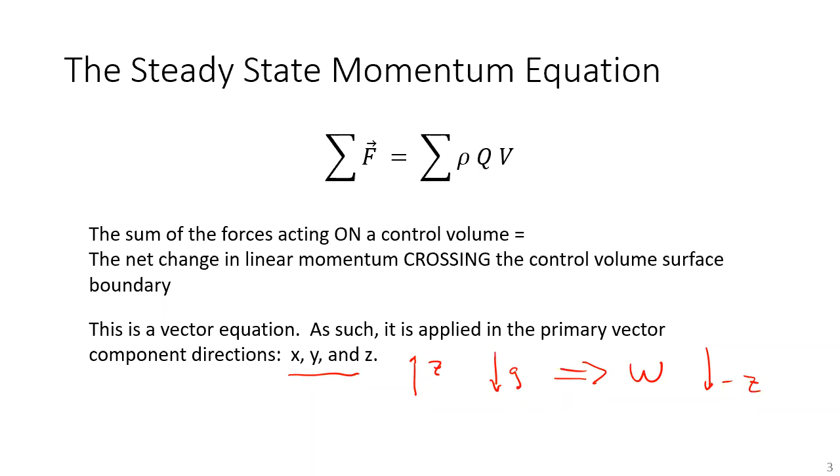And typically we align z to be vertical and gravity is in this direction. And so the net result is weight is a force in the negative z direction. So whenever you have analyses looking at something in the vertical, you have to start including weight. A lot of times when we're calculating this force, we're trying to restrain against the force. In that case, your restraint not only includes the weight of the fluid, but the weight of the control volume. Let's say it's a big pipe fitting the size of this room. So that resultant force would also have to include the weight of the external system itself.

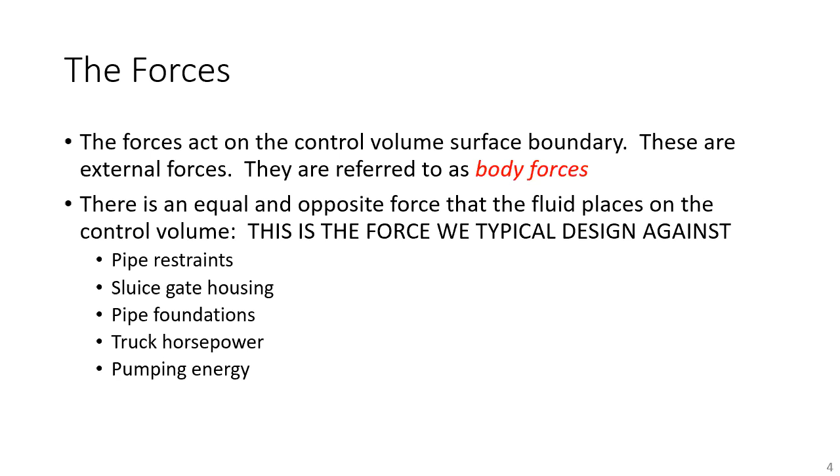So the forces are what we refer to as body forces. And again, there is a force of the control volume on the fluid. That is what's found with the momentum analysis. There's an equal and opposite force of the fluid on the control volume, and that's what we're designing against. And I gave you some examples. This is a slide you saw previously.

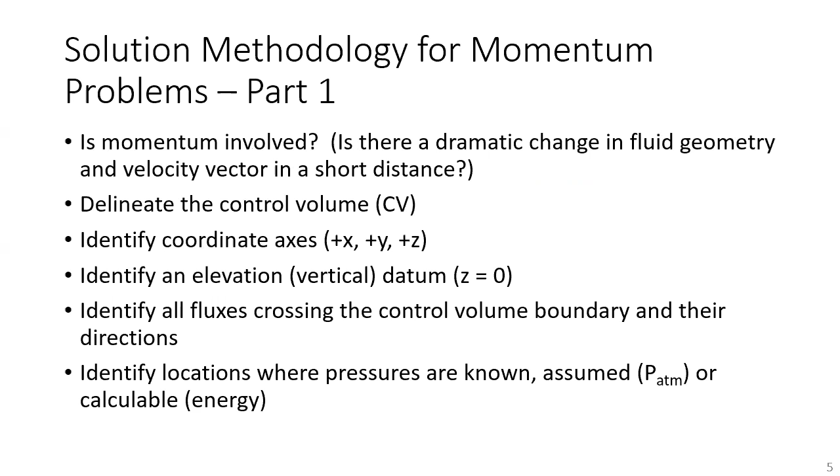So then I went through these methods, and I'm going to go through these quickly because you're going to see them on future slides. So as before with energy and all the others, I give you a rubric. Just follow the recipe and no one gets hurt. So again, there were 2 pieces to this, and if you follow the recipe, you can get through these types of problems. And lastly, how we draw the control volume is really important. We extend the control volume to either no flow boundaries or locations where we have one-dimensional flow. And where we have flow, we draw the control volume perpendicular to the velocity vector.

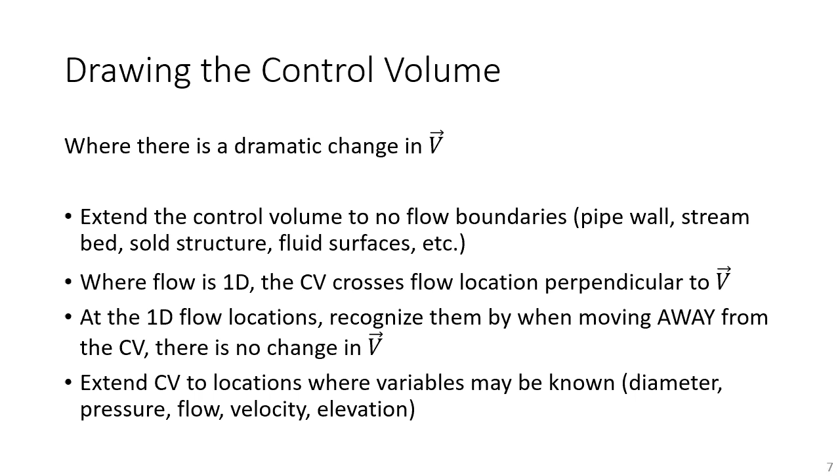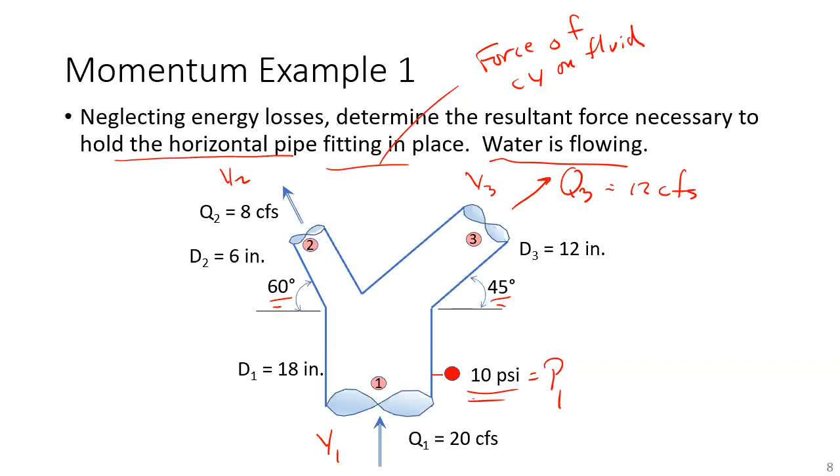So this is our problem, and this is what we're trying to solve. So again, you're going to see it on the next few slides, the same figure. And then on the left-hand side of this slide are all the steps. So first problem, is momentum involved? Is there a dramatic change in fluid geometry and velocity vector in short distance? Yes. So now you follow the rest of the steps.

The next thing, we need to delineate the control volume. And so again, the control volume is going to go to where we have one-dimensional velocity vectors. And when you see it drawn in here, we have one-dimensional velocity vectors here, here, 2, and here. And then everywhere else outside of those 3 locations, it's just the skin of the pipe. That's a no-flow boundary. So that's our control volume about which we're trying to do the momentum analysis.

It's hard to do a momentum analysis, especially for someone to review your work, if you don't show them what your control volume is. All right, the next step is to identify the coordinate axes, X, Y, and Z. And in this particular problem, we're just going to say that X is perpendicular to where 1 is coming in, and Y is collinear with 1. And again, the whole problem is in a horizontal plane.

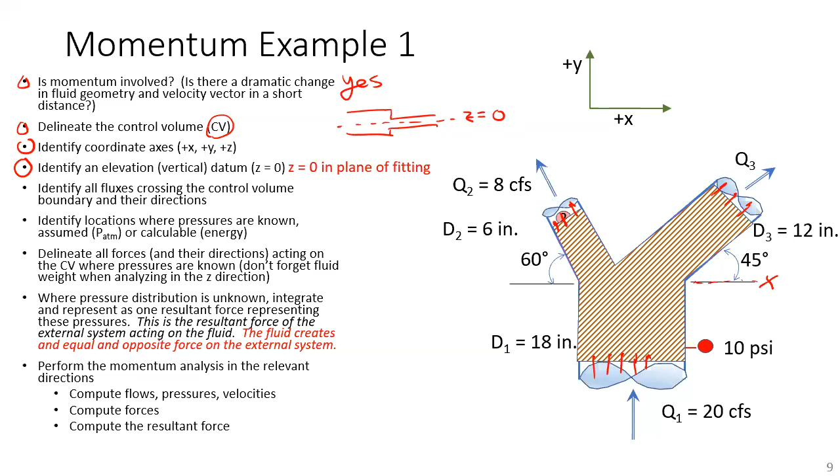So if we looked at this thing, here's the 18-inch pipe coming in, and these are the two pipes going out. There's two of them, one over the other. And so this is where Z is equal to 0, right along the center line of the pipes. Next thing, identify all fluxes crossing the control volume boundary and their directions. So I think you can see Q1, Q2, and Q3 have been called out.

And so we know what those fluxes are, and we found Q3 by continuity, and we know their directions. Their directions are important because that direction is associated with the velocity vector at each location, which is going to factor into one of the two sign conventions used for the momentum flux terms, rho QV.

The next one, locations where pressures are either known, assumed, or calculable. And I think you can see down here, P1 is 10 PSI. There's no reason to believe that there is a free jet at P2. You can see the pipes cut away, and there's also a P3 here. And this is P1. Okay, so we've identified locations where we know the pressure.

All over the rest of the surface, all over the skin of the pipe, there are pressures. And we're going to wrap those all into a resultant force. We don't know what those pressures are. They're very difficult to calculate. So the next thing we're going to do is to delineate all forces and their directions acting on the control volume where the pressures are known.

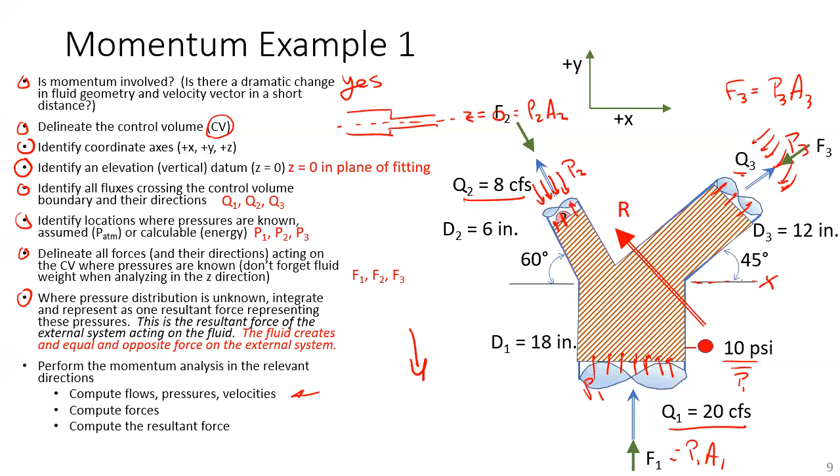So following these in order, for the velocities, we know we have Q1, Q2, and Q3. And so V1 is Q1 over A1. So Q1 is 20 cubic feet per second. And A1 is pi over 4 times 18 inches squared, which is 1.77 foot squared. And that's equal to 11.3 foot per second. Okay.

So I don't think I need to bore you with continuity now, but we're doing the same thing at location 2 and 3. We know the discharge, we know the pipe diameters. At location 2, the pipe diameter is 6 inches, the discharge is 8 cubic feet per second, and we get a very high velocity of 40.7 feet per second.

At location 3, the pipe diameter is 1 foot, 12 inches, and we know we have 12 cubic feet per second. So again, that gives us 15.3 feet per second. So not only is our V2 and V3 different in orientation from V1, but they're different in magnitude. Okay, so we'll have these 3 velocities to continue.

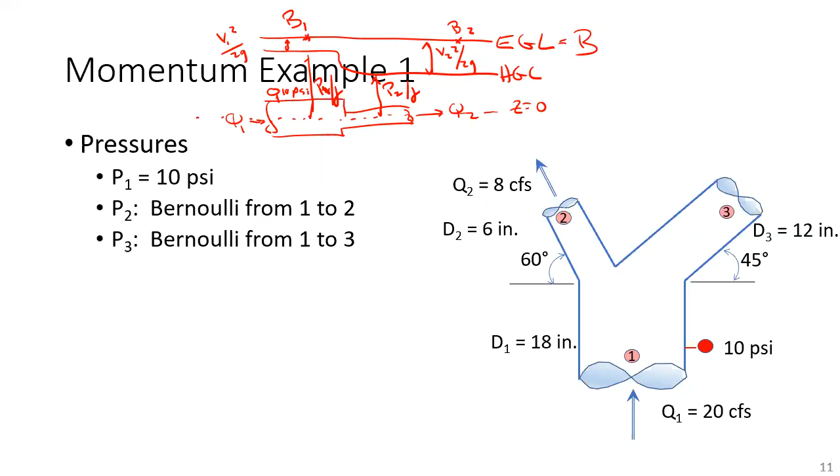So looking at these energy statements, from 1 to 2, we would say the velocity head at 1 plus the pressure head at 1 plus Z1, V1 squared over 2g plus P1 over gamma plus Z1 is equal to the Bernoulli sum. And that's equal to the same thing at location 2. And there's only one unknown in this equation now, and that's the pressure at 2. So we know that Z1 is equal to Z2, which is equal to 0. They're on our datum, our elevation datum.

V1 from the last problem, from 2 slides ago, we calculated from continuity to be 11.3 feet per second. V2 we calculated to be 40.7 feet per second. And so now, knowing that P1 is 10 psi, we would say that 11.3 foot per second squared over 2 times 32.2 foot per second squared plus 10 psi times 144 inches squared per foot squared divided by 62.4 pound per cubic foot. Remember, this was water,

is equal to 40.7 foot per second squared over 2 times 32.2 foot per second squared plus P2 over 62.4 PCF. So again, there's only one unknown in that equation. And so we would just go through this exercise and calculate the pressure at 2. And the pressure at 2, in case I wrote over it, is minus 44.4 pound per square foot, which is minus 0.31 PSI.

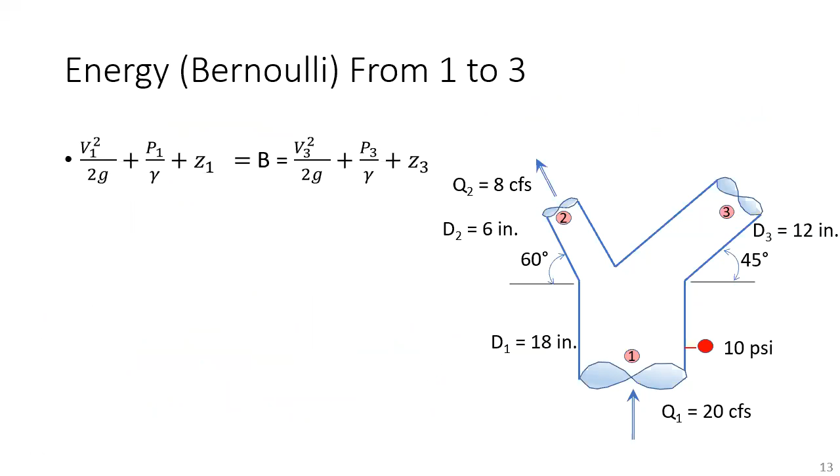So we would now write our Bernoulli equation. In this case, I chose to go from 1 to 3. Again, you would get the same answer if you went from 2 to 3. As before, we know that both of the elevations are on our datum. As before, we know the velocities from continuity. And as before, we know the pressure at 1. And so we would get a very similar equation to what we just had, only instead of the subscripts of 2, we now have the subscripts of 3. And we would solve that P3 is 1338 pounds per square foot.

But I want you to see something incredibly important, because you have people who colloquially work with pressure distribution systems. For example, the Public Works Department. And their thought is water flows from high pressure to low pressure. And in fact, that's what you see here, that the 2 other pressures are lower than the 10 PSI. But you could easily, if you had gone to a larger cross section, had flow going from low pressure to high pressure.

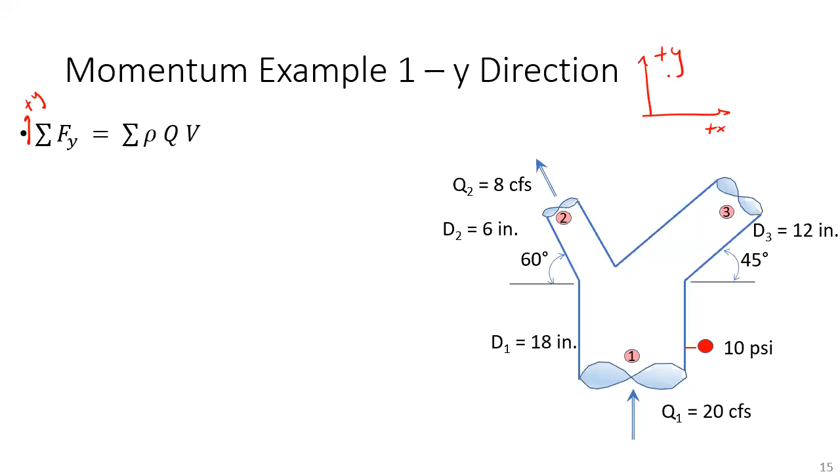So now we're going to look at the y direction. And again, plus y and plus x look like this. And so location 1 is collinear with the y direction. And when we look at these other two locations of either rho QV or the forces, each of those has a component in the y direction.

So first we'll look at the left-hand side, the sum of the forces. So the first thing we have is P1A1. And again, that would be F1 due to the pressure distribution at the bottom. And then at location 2, F2y is F2, which is the pressure 2 times the cross-sectional area 2. The component in the y direction is now the sine of 60 degrees, and it's operating in the negative y direction, just like force 1 was operating in the positive y direction. And so we follow that sign convention for each of the forces.

After those two, we see that again, at this location, we have a rho Q3 V3 term, and we have an F3 term, and F3 also has a component in the negative y direction. And so we need F3y, because we're just interested in the y direction. So again, we have a negative sign because F3y is in the negative y direction. F3 is P3A3, and the component in the y direction is sine of 45.

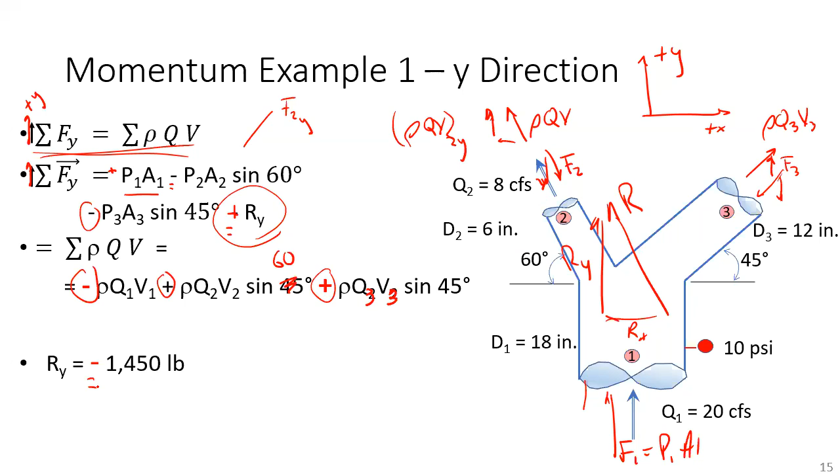So if we look at this, this is what we assumed. We assumed that we had Rx and Ry in these directions. And what we found was that the first one was minus 638 pounds. And the second one was minus 1450 pounds. So we use those negative signs to just have those component vectors go in the other direction. So our final analysis would be that this is the direction of the resultant vector. It's got a component to the right now of 638 pounds. And it's got a vertical component downward at 1450 pounds. Right?

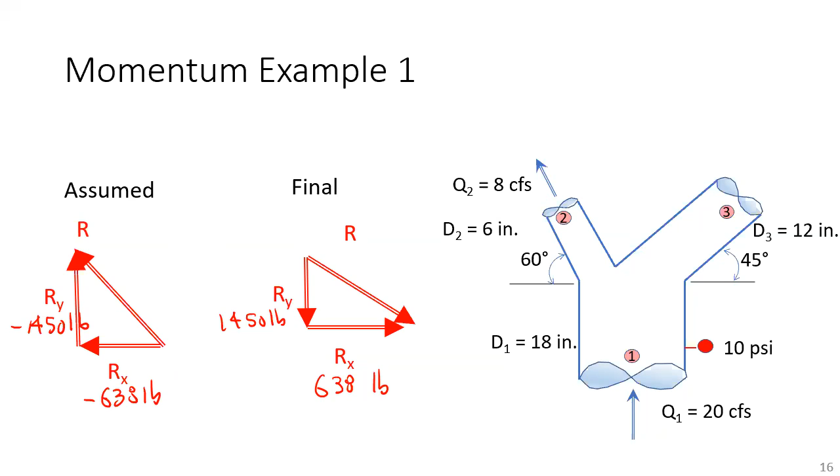And now that you know the two components, we know that we can get the total magnitude of the resultant vector. This magnitude is going to be equal to the square root of Rx squared, 638 pounds squared, plus Ry squared, 1450 pounds squared. And that gives us a total value of 1603 pounds.

And what we would also recognize is we could either look at the angle off of the vertical, I called that theta, or we could look at the angle off of the horizontal. Half a dozen of one, six of the other. It's a right triangle. If you know one, you know the other.

So in this case, if we define the angle between R and the vertical, the y-axis, then cosine of theta would be Rx divided by R. And therefore theta is 64.8 degrees. So now you know the line of action of this force. Questions?

The question asked at the very beginning: what is the force of the pipe on the fluid? That's what you just found. If the question asked, what's the force of the fluid on the pipe? It would be equal and opposite. I think I've said that over a dozen times in here now, but that's one of the first things you need to look at. You know, it only costs you a point or two here. When you leave here and you design something, that's not a happy face when you actually assume the wrong direction for a force.

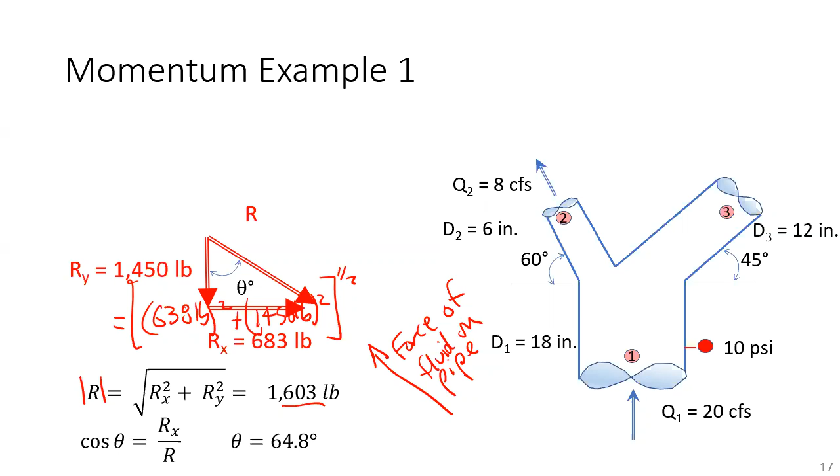Okay, so if there's no questions on that, what I want to do is, in the last 10 minutes, broach this topic, and then we'll continue with it next time. So I want to first talk about fixed vanes, and then we're going to move to moving vanes, okay? Moving vanes are what are inside pumps and turbines. And what you're trying to do is convert kinetic energy to pressure, and that's done with momentum.

So typically for the vane problems, the most important thing is that you have free jets. That makes life so easy for you, as you will see. Because if your control volume goes out to a free jet, the pressure in a free jet is atmospheric. And if you work the problem in the atmospheric pressure or gauge pressure datum, all those forces are zero because all the pressures are zero. Very convenient. And so typically for the fixed vane problems, the only force you're looking at is the force of the vane on the fluid. That's the only thing in the sum of the forces term.

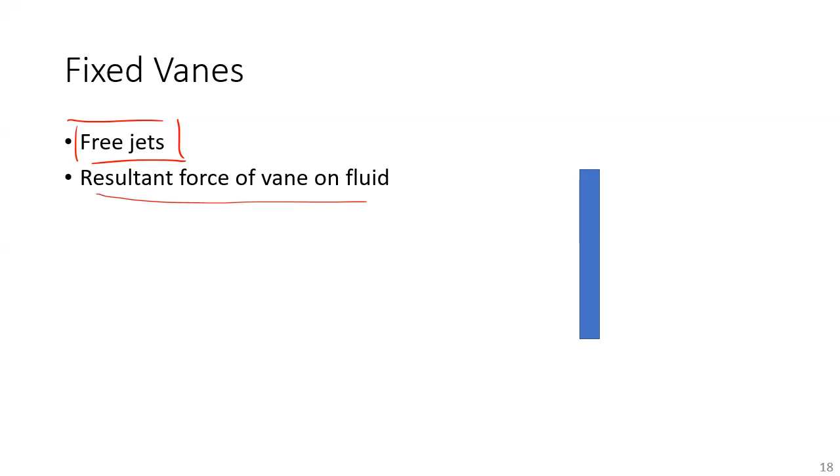So for example, here's a vane. Think of it as a plate. So you're looking at the edge of the plate, and the plate might be just a rectangle. Okay, and you're looking at the edge. And assume, for example, that you're actually looking in a horizontal plane. So here's the plus X and here's the plus Y. So you're looking down on this thing. And so what could happen is, for example, you've got this flow coming onto this plate. Again, we call it a fixed vane, but it's just a plate.

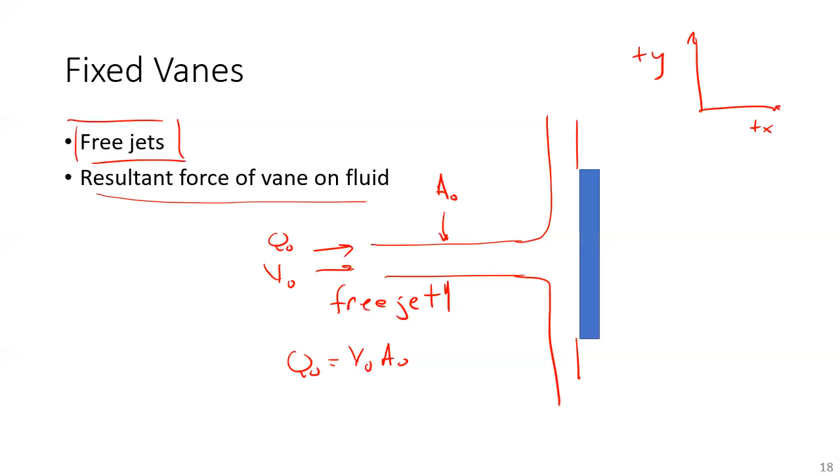And so this is a free jet. And it's coming in at Q0 with a velocity V0, and it of course has a cross-sectional area A0. So Q0 is V0 A0. Okay. And then let's say that this plate perfectly splits the flow.

So, simple question. Is there a dramatic change in the geometry of the flow field in a short distance? Yes. If you didn't have that plate there, this fluid would not be splitting like it does. It would just keep going in a straight line. And in fact, if nothing was holding that plate in place, would it stay there? No. So what's happening is there's some nonlinear pressure distribution on the backside of this plate, pushing against the oncoming jet.

And that is integrated into, and I'm going to draw it like this, integrated into this resultant force. I'm assuming a direction for it. I'm assuming it has X and Y components. Maybe it doesn't have a Y component. I can go through the analysis and find out it'll be zero. Okay. So this is what's happening in this problem. And so typically what we're after is this resultant force. What's the force we need for that plate to be applying to the fluid?

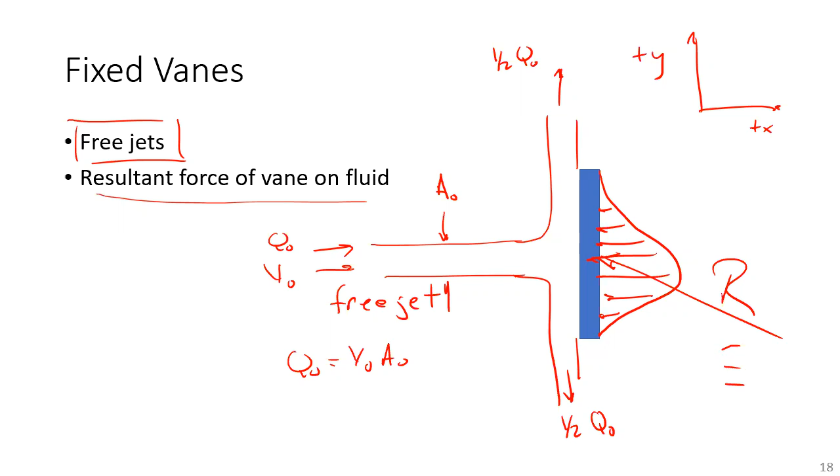All right, so we're going to see the same thing. I'm just going to redraw it for you. And we follow this all the time. We're following this procedure. So the first thing is to draw the control volume. And how we're going to do that is here we have one-dimensional flow. Out here we have one-dimensional flow. And so we're just going to have the control volume.

I figured out how to use colors finally.

This is our CV. It's all the fluid, and we went out here for a few reasons. One, at all those locations, again, it's one-dimensional flow. But two, those are free jets. If you had gone back somewhere onto the plate, it's not a free jet now.

There's a pressure distribution at the bottom of that fluid, and it permeates to the top of the fluid, where yes, up here at the top of the fluid, you have atmospheric pressure, but not throughout the rest of that water flowing against the surface. So you extend the control volume to beyond the plate. And so again, we're going to be solving the momentum equation.

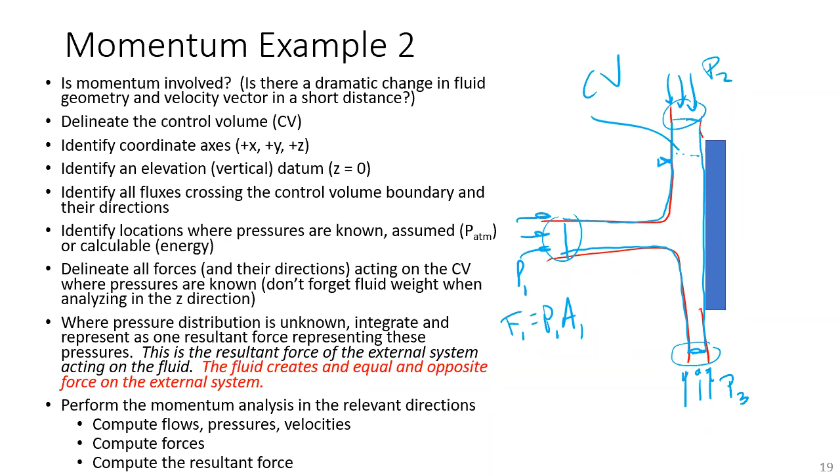And what I'm drawing is the pressures on the end. So this is P1, P2, P3. And F1 is going to be P1A1. But all of those pressures are atmospheric. So all those forces are zero. That's the key thing to understand in the vane problems. So we're going to be subscribing to this table, but I want to go through it.

So for this one, again, here's our coordinate axis, plus X, plus Y, and we have a control volume. And we're going to have 1/2 Q0 here, 1/2 Q0 here, and Q0 here. And we have V0 and A0. So you're looking down on a horizontal plane, and we see this, and then we just identified that everything in here is our control volume.

So we're going to be solving this equation in component directions. So for example, we can first look at the X to the right being positive. And we said this is going to be R, so we're going to have Rx in the negative X direction, as assumed. So on the left-hand side, the sum of the forces, well, we've got F2, F3, F1. But as I said before, since they're all free jets, they're all zero. All you have for the sum of the forces is minus Rx. That's it.

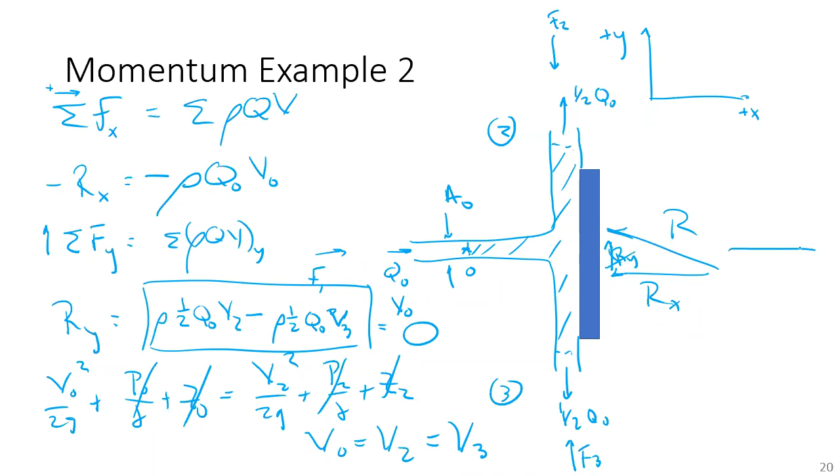So what does that mean? That right-hand side is 0. And so there is no Ry. R is all horizontal, as you'd expect. Right? It wouldn't be true if this was tilted in one direction or another. So that's the vane problem.